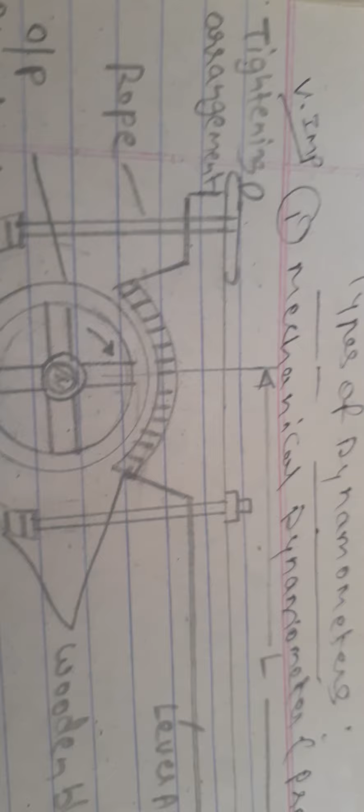So today we'll be discussing the types of dynamometers. In the previous class we discussed the proving ring, that is a force measuring device, and this is a torque measuring device. These dynamometers are torque measuring devices. First of all, we'll go with the mechanical dynamometer. You can all see the sketch, mechanical dynamometer.

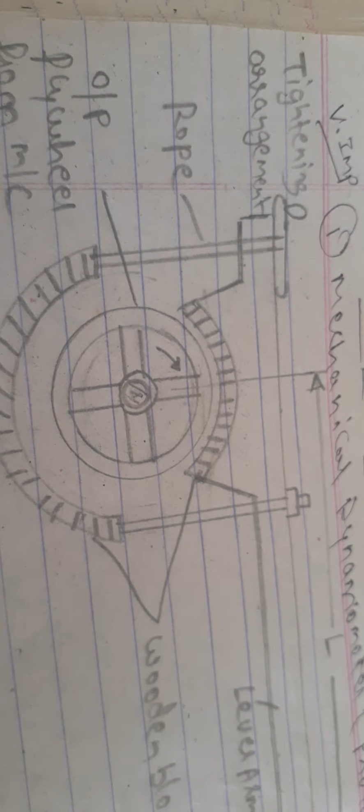These dynamometers are of absorption type. The most familiar and simple device is also known as the Prony brake. In the bracket I have mentioned mechanical dynamometer or Prony brake. It will be asked in the exam as mechanical dynamometer or Prony brake or absorption type dynamometer.

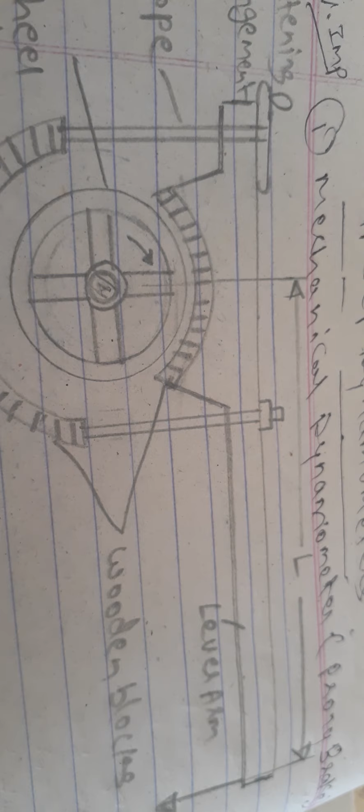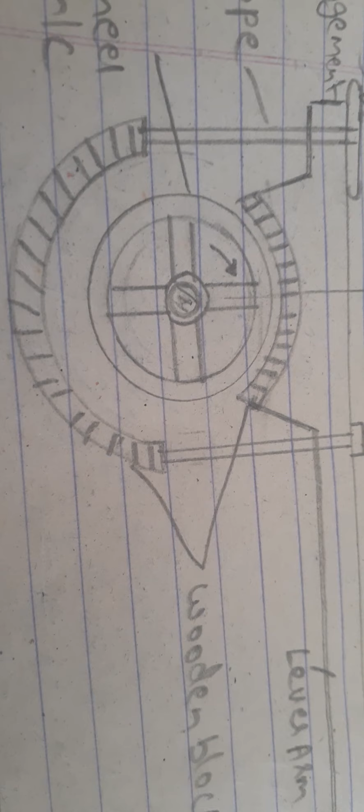Remember this. Coming back to the sketch, you can see there are two wooden blocks mounted diametrically opposite on a flywheel attached to the rotating shaft whose power has to be measured. One block carries a lever arm and an arrangement is provided

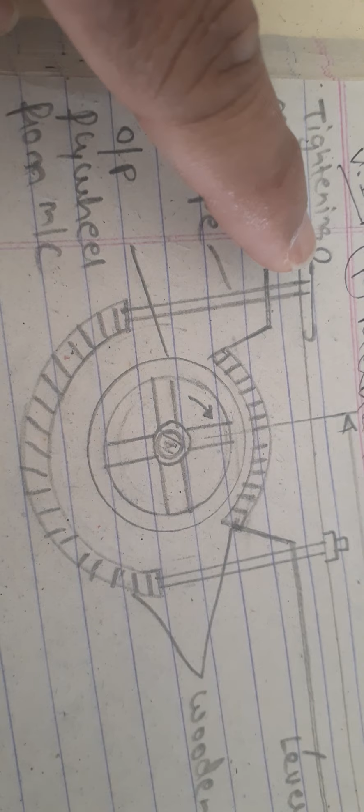to tighten the rope which is connected. You can all see the arrangement here to tighten the rope. With the help of this knob, we can tighten this rope, which is connected to the arm. Why do we have to tighten that rope?

The rope is tightened so as to increase the frictional resistance between the wooden blocks and the flywheel. That's it. The torque exerted by the Prony brake is T = F × L, where F is the force measured by a conventional force measuring instrument like a balance or load cell.

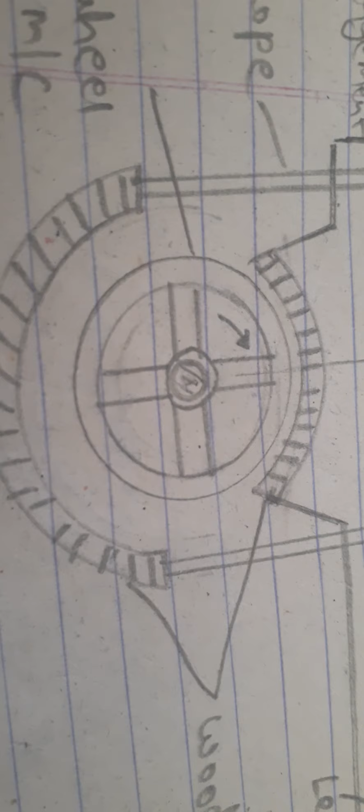You have seen these in the MMM lab, etc. The power dissipated in the brake is then calculated by P = 2πNT/60 in watts. And now the limitations of the Prony brake.

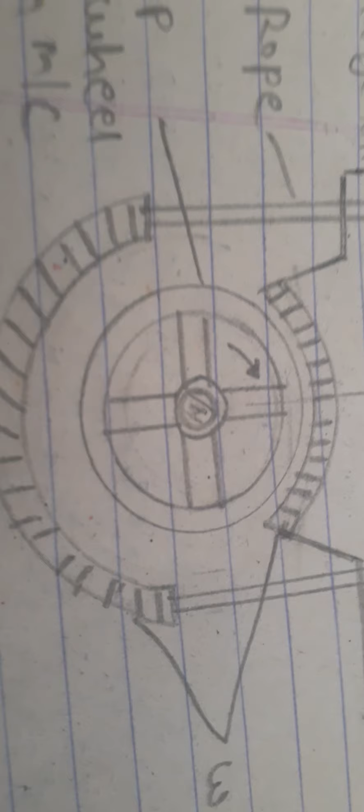Due to wear of the wooden blocks, the coefficient of friction varies between the blocks and the flywheel. This requires continuous tightening of the clamp. The use of the Prony brake results in excessive temperature rise, which decreases the coefficient of friction, leading to brake failure. These are the things.

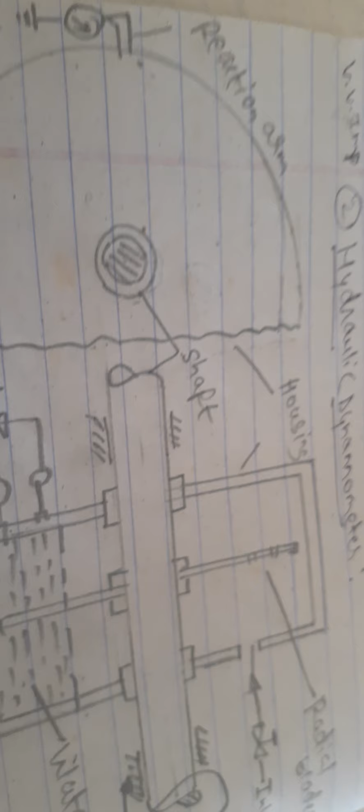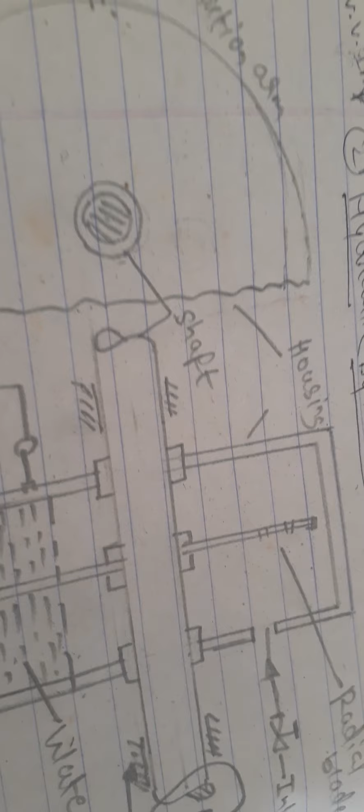Next, I am going to deal with the hydraulic dynamometer. This is one more type of dynamometer. This is the simplest form, which acts as a water brake. This power sink uses fluid friction for dissipation of input energy and thereby measures the input torque or power.

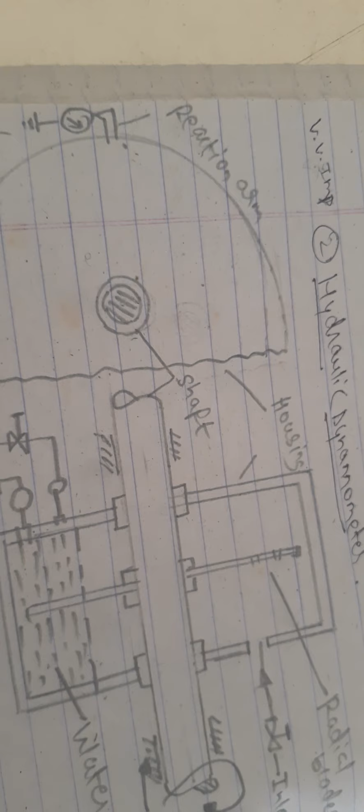Listen carefully, the capacity of the hydraulic dynamometer is a function of two factors, that is water level and speed. To maintain this system, we have to maintain the water level as well as the speed. The power consumed is approximately a function of the cube of speed. The torque is measured with the help of this reaction arm.

The power absorption at a given speed may be controlled by adjusting the water level in the housing. If you maintain the water level in the housing, you can control the power consumed also.

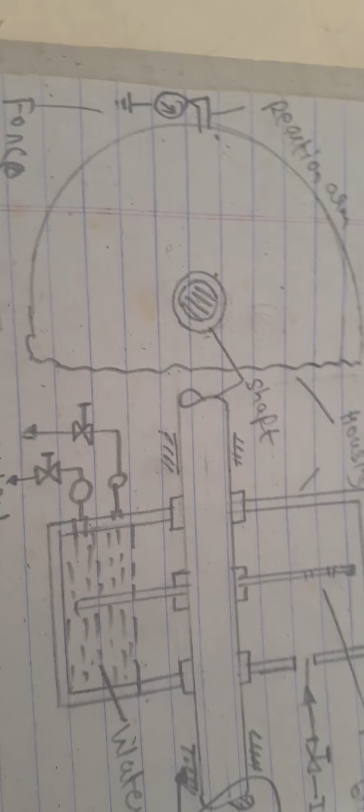Next, this type of dynamometer may be made in considerably larger capacities compared to the Prony brake. Prony brakes are used for small capacities and hydraulic dynamometers are used for larger capacities. Why? Because the heat generated can be easily removed by circulating water into and out of the housing of the system.

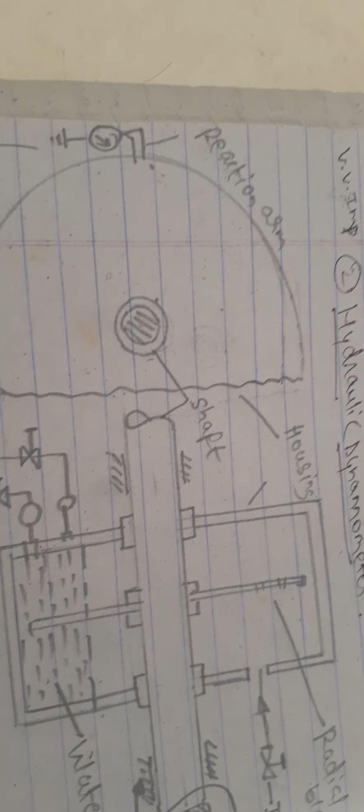And one more thing, you can see here the trunnion bearings. We have drawn trunnion bearings at both ends. These are used to support the dynamometer housing, allowing it to rotate freely, except for the restraint imposed by the reaction arm, which can be controlled with the help of the trunnion bearings.

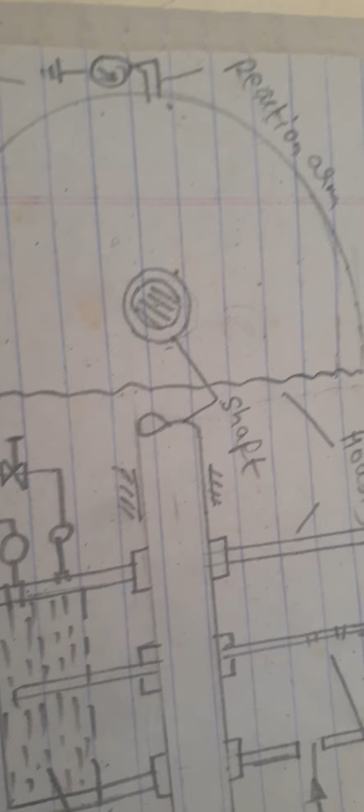In this dynamometer, the power absorbing element is the housing, which tends to rotate with the input shaft of the driving machine, but such rotation is constrained by a force measuring device. We have shown the force measuring device here; it will be similar to a load cell.